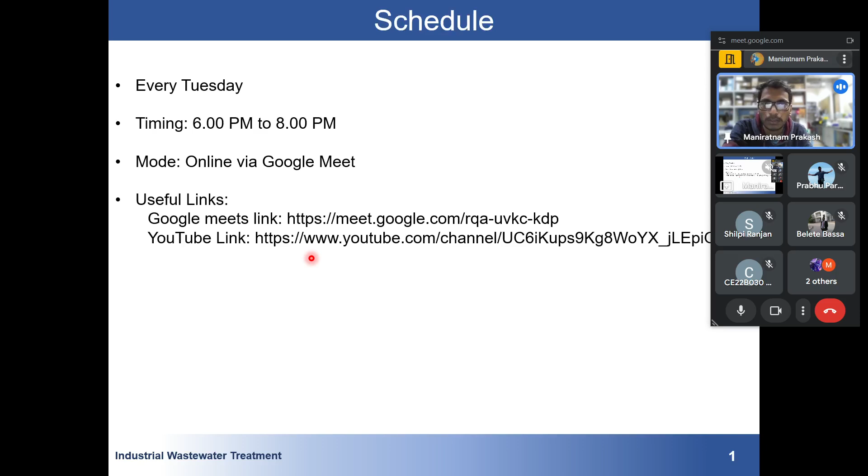Okay. So first, many of those who are attending this problem solving session for the first time, I will explain how things will work in this lecture and in upcoming lectures also. As this is known as a problem solving session, it is for 2 hours. So for the initial maybe 45 minutes or maybe 1 hour, I will be going through whatever material has been circulated to you.

Yeah, the lecture notes that have been given to you. So I will be just recapping in a very brief manner, not in a detailed way. I will be just going through some of the parts, like this has been taught and this has been taught. One of the most important things: you will benefit from this problem solving session only if you have watched your video. So I will be just recapping those things which have been discussed in the video.

And then at the end of the session, that is the other half, I will be discussing some questions that might be given to you for assignment purposes, or for the final examination if you are planning to attend it. Okay. So this will be the overall view. First there will be some discussion, and then there will be a problem solving session. I have been given 10 sets of questions. I have prepared the solutions, and those solutions will be discussed in a very detailed manner.

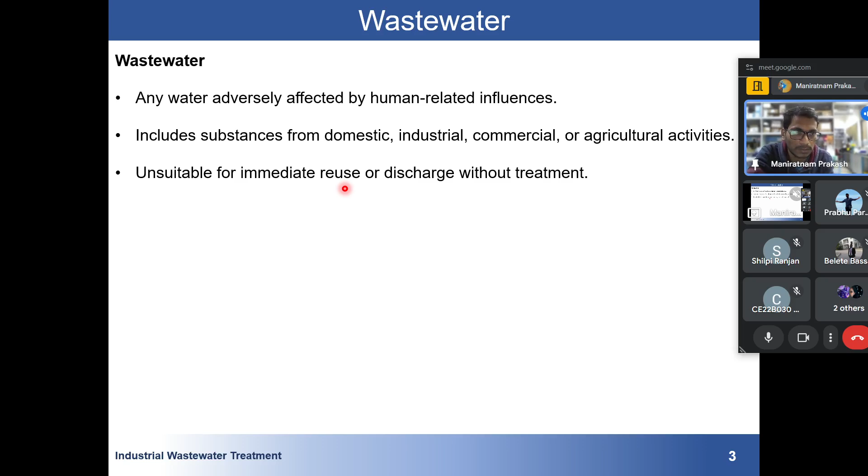And the final outcome is, once the water is affected by human activity, that water becomes unsuitable for immediate reuse and needs treatment. If there is some intervention from the human side, then that water must be treated, and only after treatment can we either reuse it or do some other kind of work.

There are several types of wastewater. The first is the most common wastewater, that is domestic wastewater.

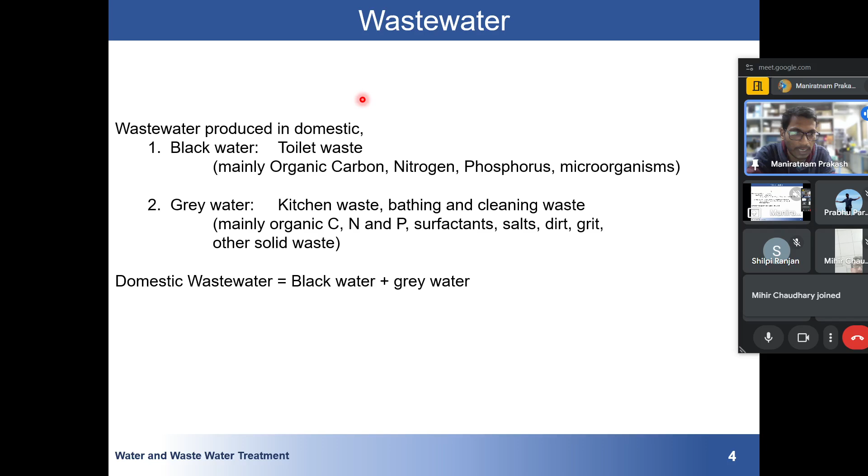Coming to industrial wastewater, which we'll be discussing in depth, it is generated from industrial and manufacturing processes. Suppose I am in Kanpur. Kanpur has a major leather industry; you might have heard that Kanpur is known as the city of leathers. For manufacturing leather, they use basic chromium sulfate.

Leather, which comes from animals, is initially very soft. To make it stiff and give it some shape, they use chromium sulfate. After treatment, this chromium will be leached out into normal wastewater if not treated well. There are provisions in every industry that if you are using this salt, you have to treat it, but we know that some industries are not following those norms.

If the water is discharged into normal sewage or a normal channel, it will mix with our normal water. So that industry is producing industrial wastewater contaminated with chromium. This was just the example of chromium. There are many examples from many places, like cadmium problems, lead problems, lithium problems. If you are residing in some industrial area, you might have heard of these kinds of problems.

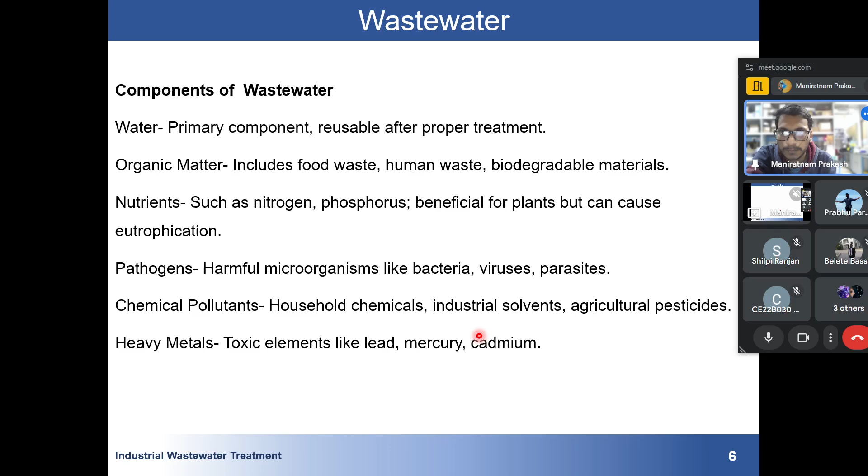So there are several practices of wastewater management: there should be proper collection of wastewater, like a proper channel, then it should be disposed, and if water is not so much contaminated, then it should be reused. We have learned about this. The treatment process requires physical, chemical, and biological methods to remove contaminants and ensure water is safe for discharge or reuse.

Remember, we are seeing that once the wastewater is generated, we have to treat it, and once the wastewater is treated, then we have two purposes. What I mean to say is that in India there is one pollution control board known as CPCB, the Central Pollution Control Board.

So this has set some norms, like now if you are treating water, you can reuse it. Reuse depends upon how much you have invested in your treatment and how advanced a treatment process you have applied, if the water is suitable for reuse. There is a particular requirement that if it meets certain criteria, then that water is suitable for drinking purpose, if the treatment process is meeting all the standard criteria for drinking water, that is IS 10500.

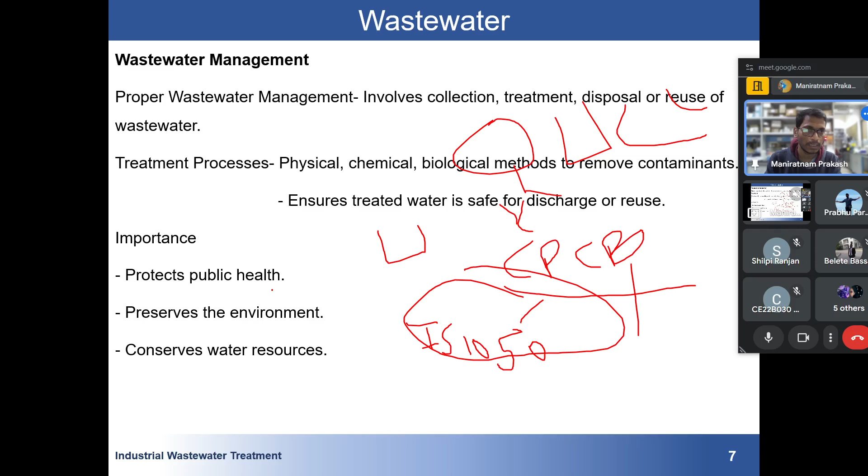Then importance: we know that we have to protect ourselves. Suppose without treatment you are discharging any wastewater, then what will happen? It will be mixing in the river, in the lake, and that lake or river will also be polluted with wastewater, and it will cause human health effects. And not only human health, it will affect aquatic life and all these things.

So we have to protect the public, protect the environment, and conserve water resources. We know that our fresh water is very limited. We have been reading from our childhood that we have a very limited amount of water, and if we are doing this wastewater thing, it will be a burden on our current water resources. Okay.

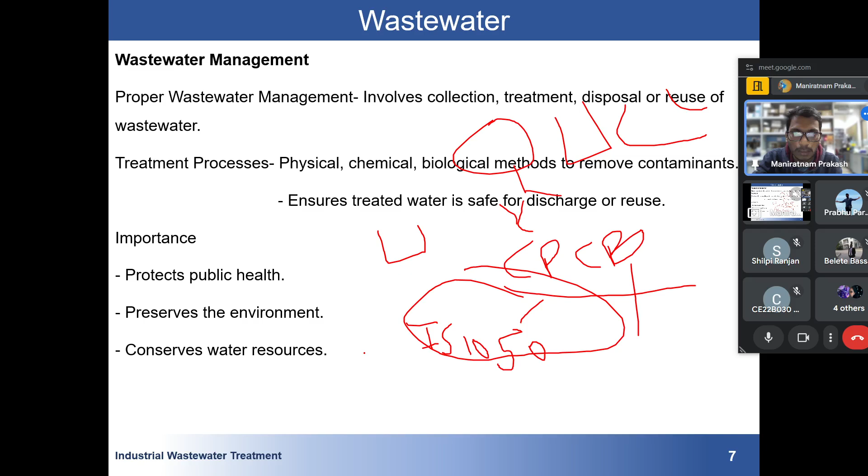So I think this was all about this. Whatever I was showing you, I was showing from the material which you have been given. So I think all of you have gone through this material. Have you received this PDF file, lecture 1? Yes. So in this PDF there are many things. Whatever was possible for me, I wrote in the PPT, and that PPT will also be available to you, and this PDF has already been given to you.

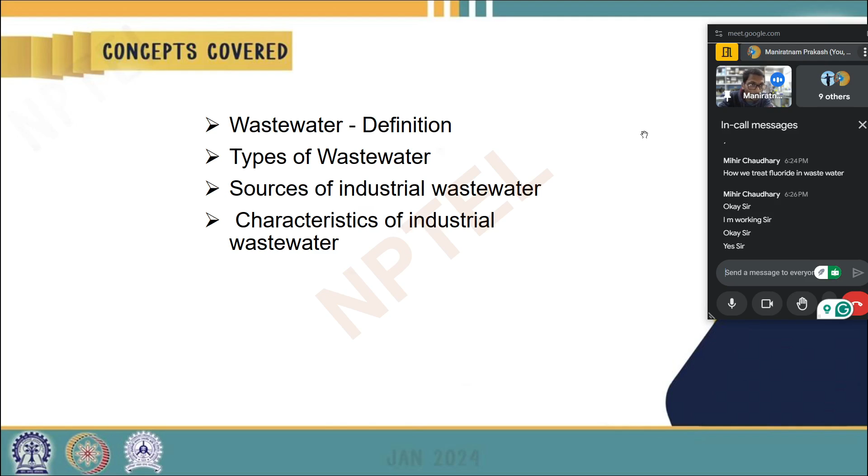This treatment process also depends upon how much fluoride is there. If high fluoride is there, people add calcium to the water. Calcium and fluoride react and precipitate CaF2, and we get treated, fluoride-free water. Any more questions, anyone?

There are several metal industries, aluminium, iron. Similarly paint: in paint we use lead. Wherever there is a paint industry nearby, several people have reported lead problems. Then the dairy problem: a huge amount of organic matter, milk and so on. Then pulp and paper industry, leather industry.

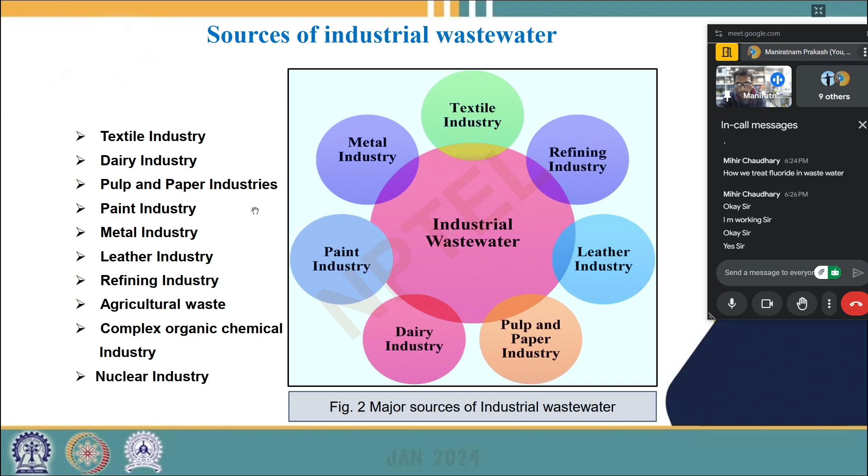Wherever there is a leather industry, you will see a chromium problem, and the chromium problem is very severe. If you are curious, search on Google Scholar chromium in Kanpur. The first thing will be that Kanpur, the city of leather, uses chromium sulfate. So these are some of the industrial wastewaters, and there is nuclear wastewater, the uranium problem. Storm water we have already talked about. Common pollutants we have also seen; I have discussed them very briefly, like suspended solids.

Then we have this thing I have not discussed. This is new: what are the different characteristics of wastewater? First there will be physical characteristics, how it is looking. Your wastewater will be very turbid, very black in color, there will be some foul smell coming, there will be a huge amount of solids, and temperature might depend upon what kind of wastewater is there. If organic wastewater is there, the temperature will be normal, so temperature is a variable thing. Okay, then we have chemical characteristics.

Dissolved oxygen, DO is dissolved oxygen. Remember, we know that our normal water has some normal dissolved oxygen, around 4 and 5. Now imagine that you have added organic carbon, some metals, something in your water. What will happen is that the organic matter will start consuming the oxygen present in your water. It will start consuming DO, and your DO level will be very low in your wastewater.

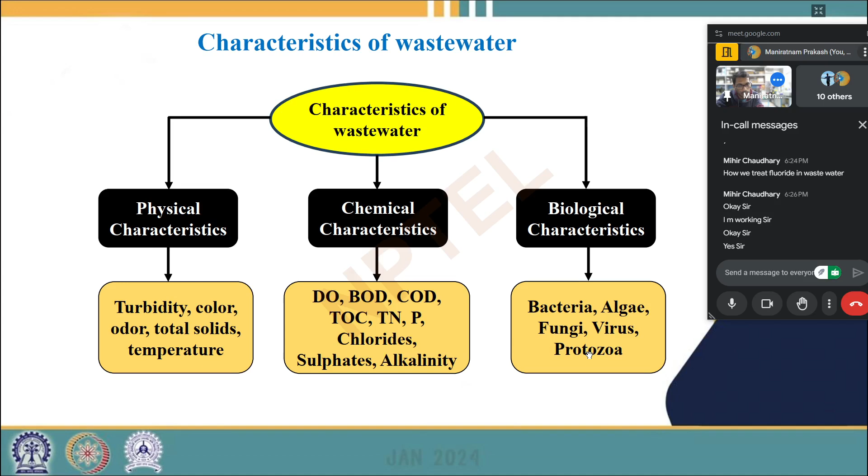Then we have total organic carbon, nitrogen, phosphorus. Phosphorus will be coming from our food, since there is some nitrogen and phosphorus in it, and also from agriculture. See, these are not characteristics of industrial wastewater, these are characteristics of common wastewater. Then we have biological characteristics: there will be some bacteria, algae, fungi, protozoa, depending upon the type of wastewater.

Okay, so this thing I have. I will be going in a very fast manner. This has already been discussed in your lecture. So if you think something needs to be discussed more, you can just stop me and ask me.

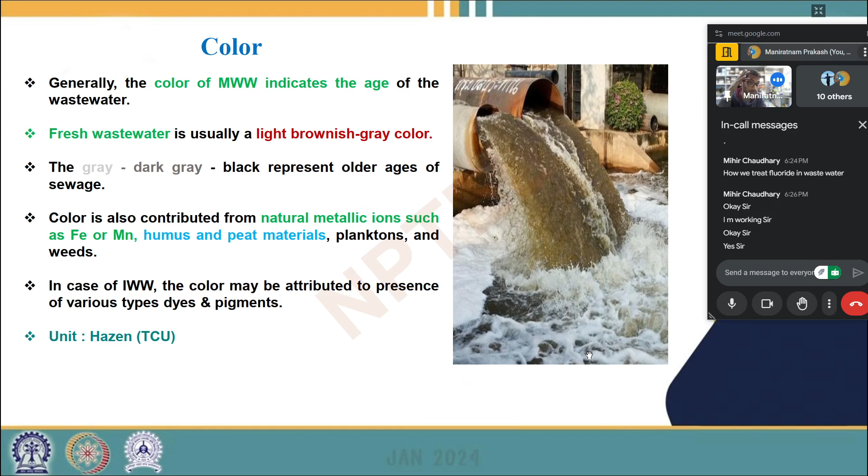Industrial wastewater. Then I said temperature depends upon the type of wastewater. Industrial wastewater may increase the temperature of neighboring downstream water. There is less DO in warm water than colder water. This is very common: if you boil your water, the oxygen which is there in water will escape. That's why it is a common statement. Less DO is available for natural biodegradation of organic matter. Bacterial action increases at high temperature, resulting in acceleration. So this is the role of temperature.

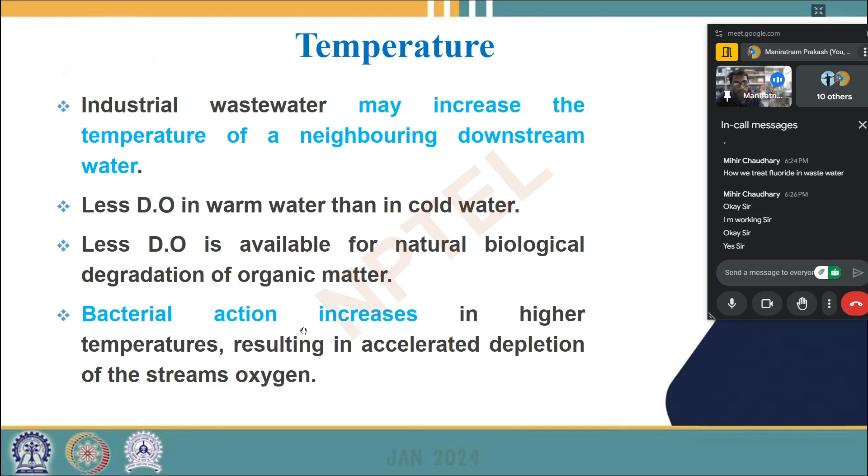Effect of temperature: rate of reaction increases, rate of resolution increases, viscosity of the water also decreases. Okay. Total solid, which we have already seen: there will be settleable solid, colloidal solid, dissolved solid, and floating solids. Okay. So one should have an idea of this thing also.

Suppose if you are performing some experiment, and if you are finding some kind of solids, then what will be its normal size. This chart is a very famous chart, everyone uses this. You can see that anything below 0.001 micrometer, that is 10 to the power minus 9 meter, will be dissolved.

I think there is a boundary point of 0.22 micron. Just go and check. There is a boundary point of 0.22 micron. If something is below 0.22 micron, it is considered as dissolved. If something is between 0.22 to 0.45, then it is known as colloidal. It is written in a very general way, but there is a particular boundary also: below this will be dissolved, above that will be colloidal, then above that will be settleable solid.

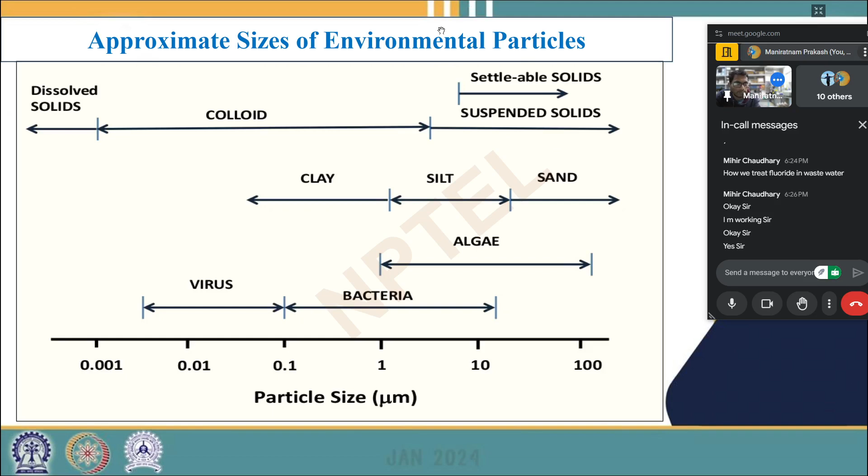But in our wastewater we have suspended solid, that you can see. Then something dissolved; we know that sodium is there, calcium is there, that will be in dissolved form, and that will also be considered a kind of solid. Then we have organic carbon, which will be volatile in nature. Then something will be colloidal, like milk particles, and all these things.

There are different tests. If you want to find out the total solid, then you have to heat your water. Generally for finding total solid, we take our wastewater and heat it at 105 degrees Celsius for 24 hours, and then we have total solid. Then for volatile solid, we heat at around 500 degrees Celsius, and for this we use a special crucible.

Heating at 105 can be done in normal chemical glassware, not our homemade glass. But for heating at this high temperature, there is something called a crucible. It is laboratory equipment that can sustain a temperature around 1000 degrees Celsius. So we put our water in that crucible and heat it at 500 degrees Celsius for only 1 hour, not more than 1 hour. At this temperature, 1 hour is sufficient.

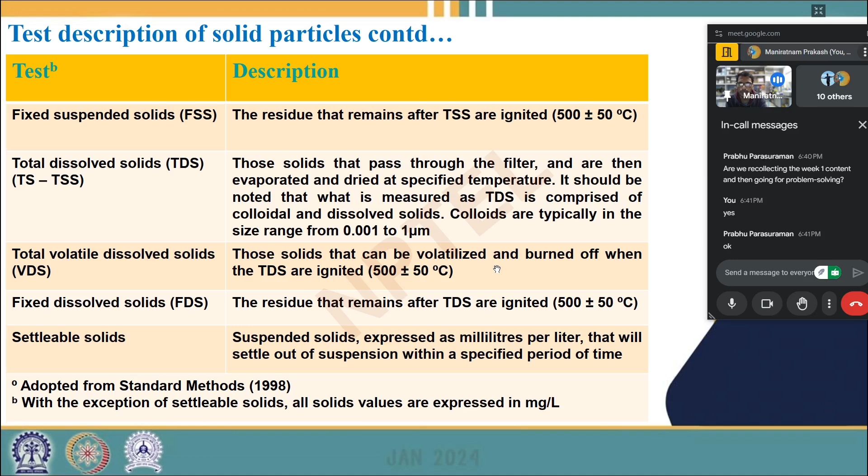Then we have chemical parameters like pH. Our normal pH is 7. Due to the presence of anything, pH might be increasing or decreasing. One should know the pH formula: pH is minus log of H+ concentration. You have to somehow find the hydrogen concentration, then take log, and then minus of log, that will be your pH. For pH measurement: inorganic salts, acid or alkali, organic matter or toxic chemicals may be present, microorganisms will be present.

Then we have biological oxygen demand. I'm not going to discuss it in detail here, but in a simple way, to degrade organic matter present in our wastewater, there is need of some oxygen. That oxygen is known as biological oxygen demand. Sorry, biochemical, not biological. This is a common misconception; people say biological. BOD is biochemical oxygen demand. So organic matter is there that is degradable.

Our organic matter will be in two forms, a degradable form and a non-degradable form. The amount of oxygen required to degrade the degradable component is known as biochemical oxygen demand. The amount of oxygen required by microorganisms for decomposition of the biodegradable organic matter under aerobic conditions is known as biochemical oxygen demand. If you have gone through the lecture, this has been discussed.

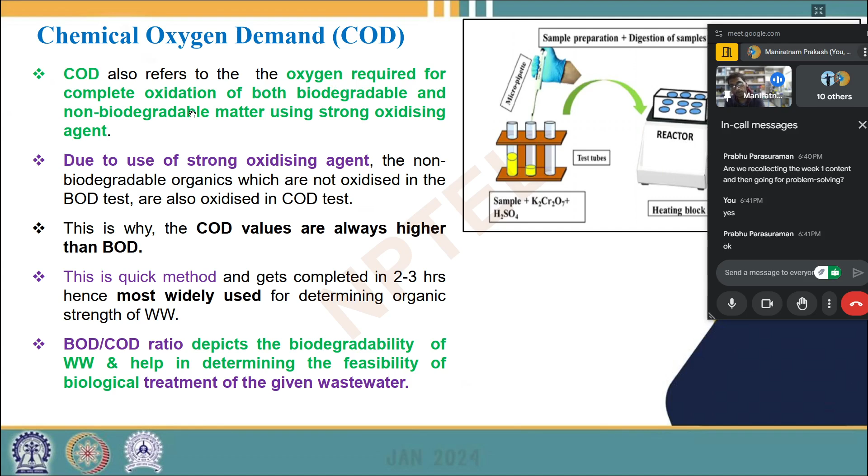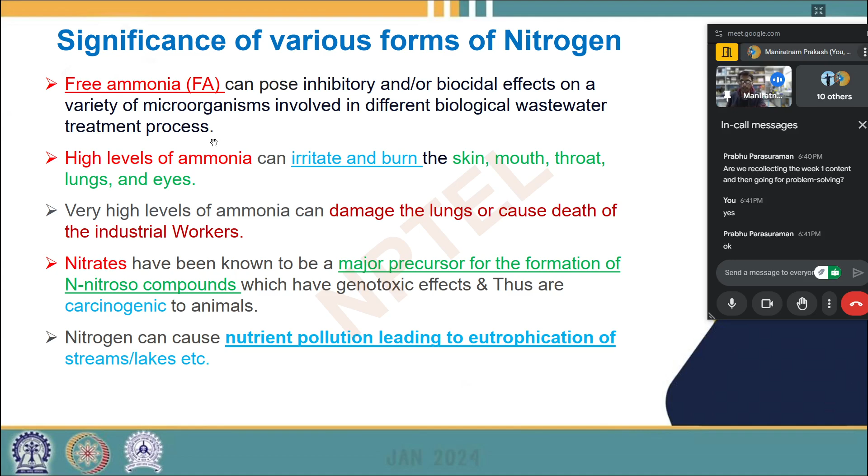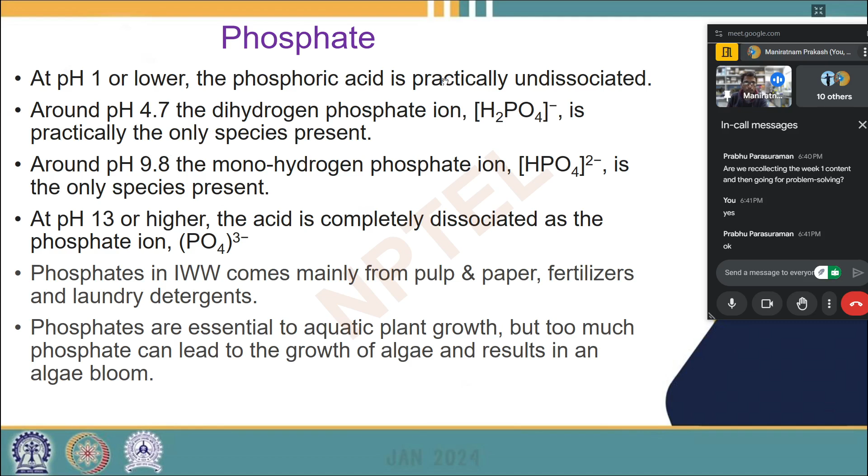Phosphate, again, will be in different forms. There are a total of three forms of phosphate, such as H2PO4. Depending upon the pH, different types of phosphate will exist in your system. But our normal pH is around 7, so most of them exist in the form of H2PO4 minus only.

Then heavy metals, which are due to industrial waste. Removal of heavy metals from wastewater is through precipitation. We will add some chemicals, and that chemical will react with the existing heavy metal, and we will have precipitation of heavy metals. Then ion exchange, then adsorption process.

You can see the different problems due to the presence of different heavy metals. Chromium is carcinogenic, meaning it is cancer causing. And there is a limit; you can look at the limit in IS 10500. Suppose your drinking water is above the permissible limit, then that water is not suitable for drinking purposes, and it also needs treatment. There is a limit for everything: chromium, arsenic, cadmium, lead, copper and mercury.

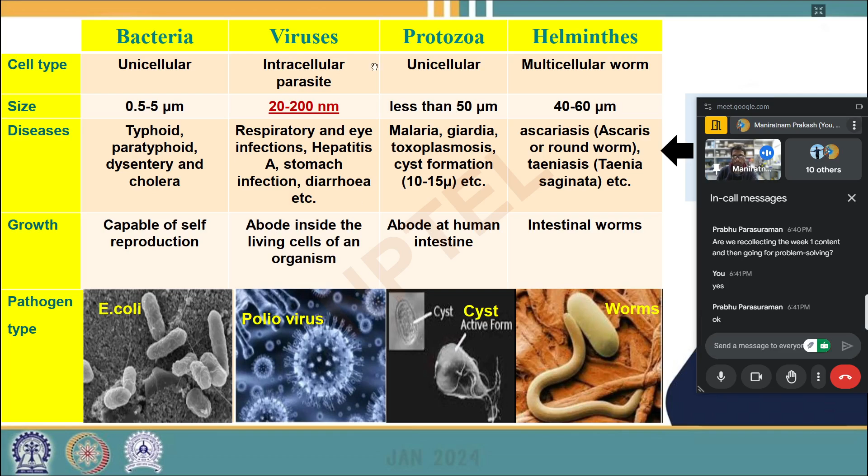Biological characteristics: we have seen that there will be bacteria, viruses, protozoa, and the presence of any of them will cause some kind of disease. So this is an important thing: what are the origins of different industries, and what kind of waste they are producing. I think you have already gone through this.

So this is what I was discussing: prevention and control of pollution. Like I said, either I can reuse it or I can discharge it. This table is very old, but the latest issue has also come.

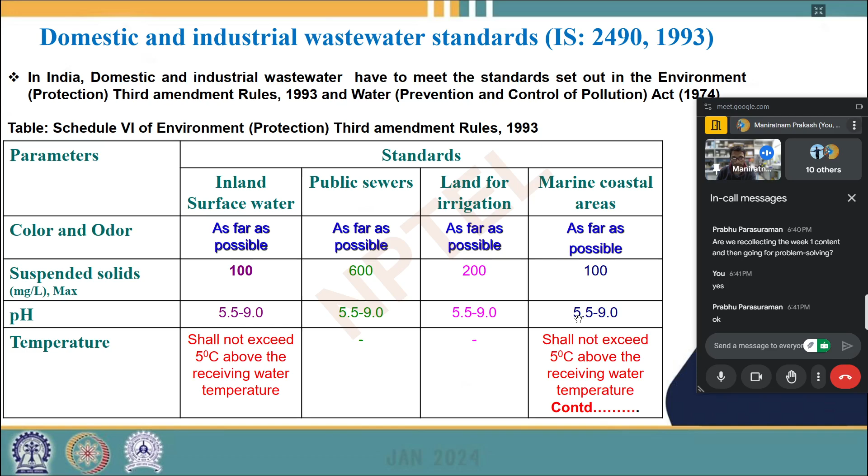Like you can see, if you are preparing for an exam, I think you should get updated with the latest norms which are there. Okay. So suspended solids: if your treatment level is such that you are bringing your suspended solids within 100 milligrams per liter, and pH between 5.5 and 9.0, then you can discharge in the marine coastal area. Similarly, different wastewater parameters have different limits, and as per that you can discharge there. Okay.

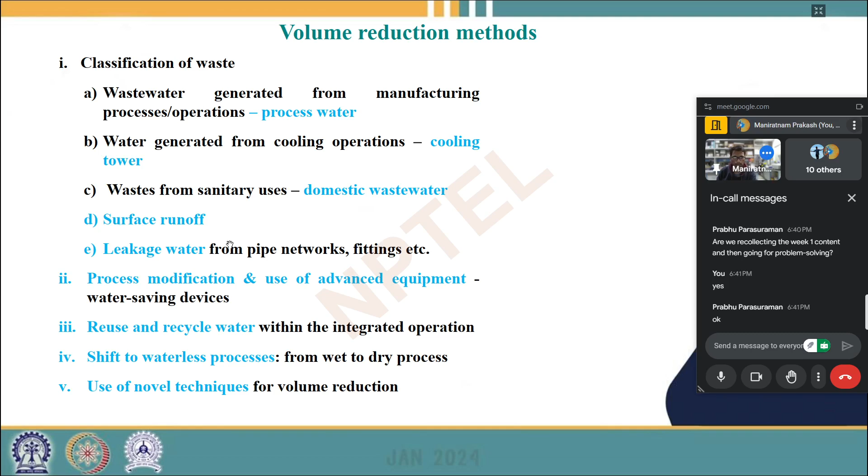So management is volume reduction. Again, this is if we have to control it somehow. There are several ways volume reduction can be done, several methods, like at home also you can. I'm not going into strength reduction and volume reduction in detail. If we talk about management of industrial wastewater, then strength reduction means we are talking about a particular contaminant. Suppose a particular contaminant is very high; if we somehow reduce its strength, then automatically we will be treating our wastewater in a far better way. Okay, there are several methods.

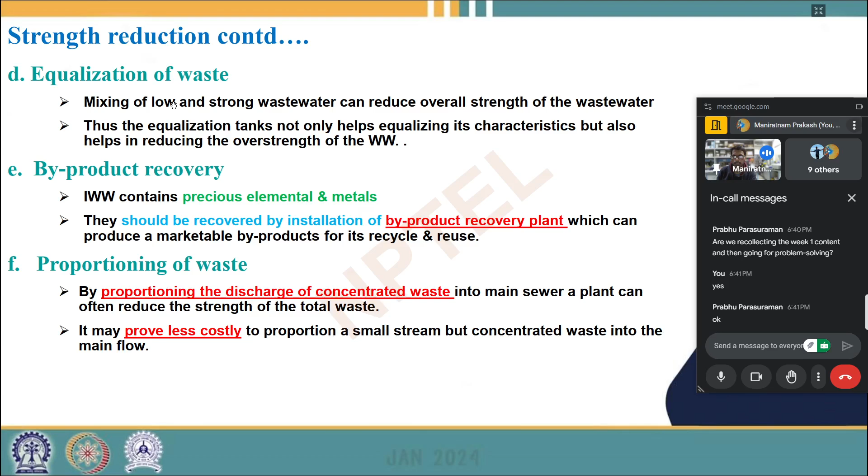Then we have the equalization tank. An equalization tank is required to equalize the flow and the concentration of incoming wastewater to the treatment plant. So till this point we were not going into the treatment plant; it was about what the public can do and all these things. But suppose your wastewater has reached the treatment plant, then there's something called an equalization tank. Okay. So for treatment purposes we have different units, and each unit has a particular capacity.

Suppose there is an aeration tank, then there is a primary sedimentation tank. Each has a particular capacity, and that unit cannot take water beyond a particular limit. So the flow reaching that unit should be maintained. Maintaining the flow and the volume the unit receives is controlled by the equalization tank. The equalization tank is often required to equalize the flow and concentration of incoming wastewater to the treatment plant. It helps in providing better mixing, air injected in the basin, chemical oxidation of reduced compounds, some degree of biological oxidation, and agitation to prevent suspended solids from settling.

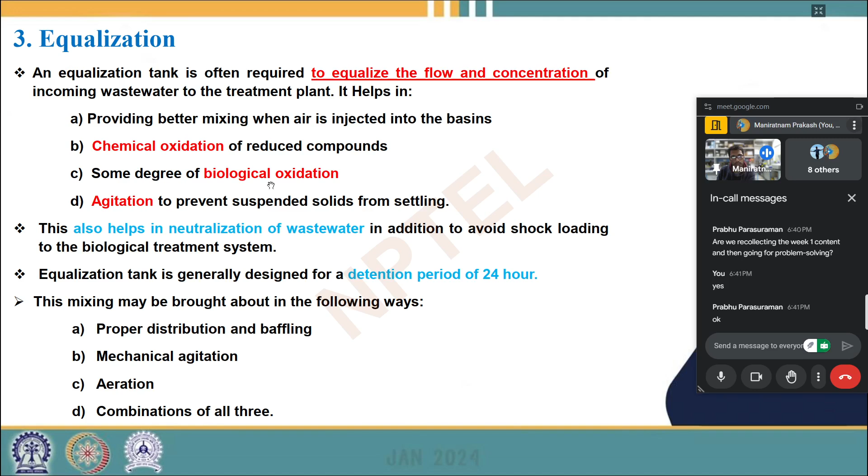Okay. So once the flow is maintained, water can be passed to the next treatment unit in a better way, so that there is no burden on the next unit. So you can see these are some of the different equipment used for mixing. Mechanical agitation is there. The use of a particular instrument sometimes depends upon the type of wastewater, or the type of minerals and heavy metals present in your wastewater.

I will give a simple example. Suppose your wastewater contains a high amount of iron. To treat iron there is no need to add any special chemical. They will pass the water into such a confinement and do agitation. Oxygen will pass into the wastewater, iron will react with oxygen, and it can precipitate out. This is the most common practice used in many industrial wastewater treatment plants. That's why mechanical aerators are used. Wooden-type agitators are spaced equidistantly along the center line of the length of the tank, operate at this speed, and are usually adequate.

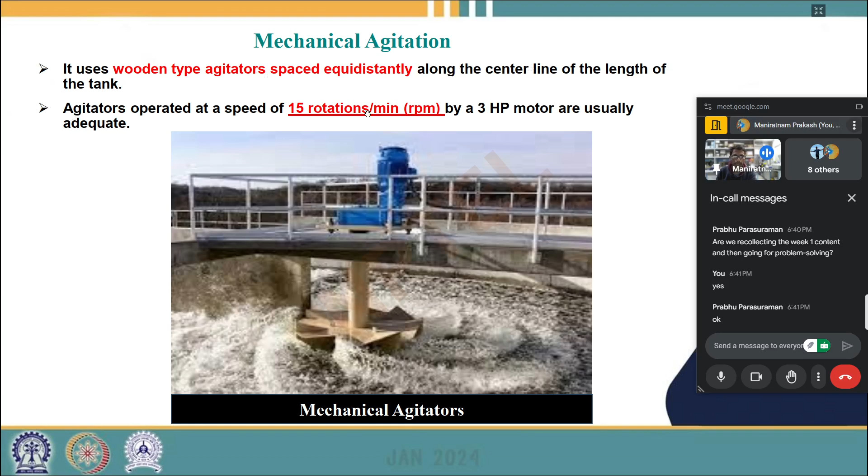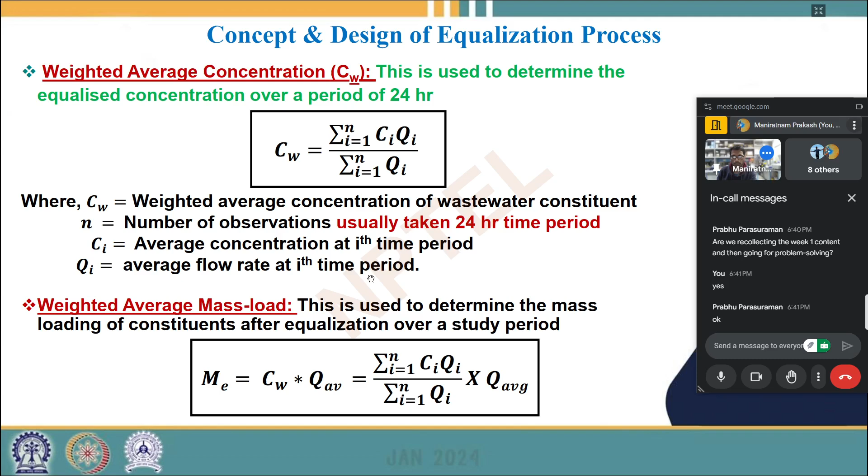Okay. So the main thing is that in the aeration tank, whatever we can take out with the help of oxygen, we take out. Now concept and design depend upon the loading. Loading means how much mass is coming per unit time. There are some formulas, like peak-to-peak mass loading. All these factors help in the design of different treatment units. Okay.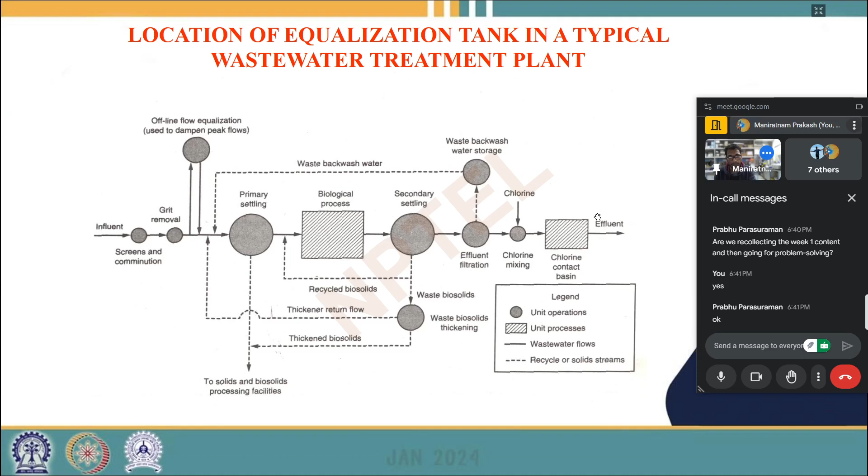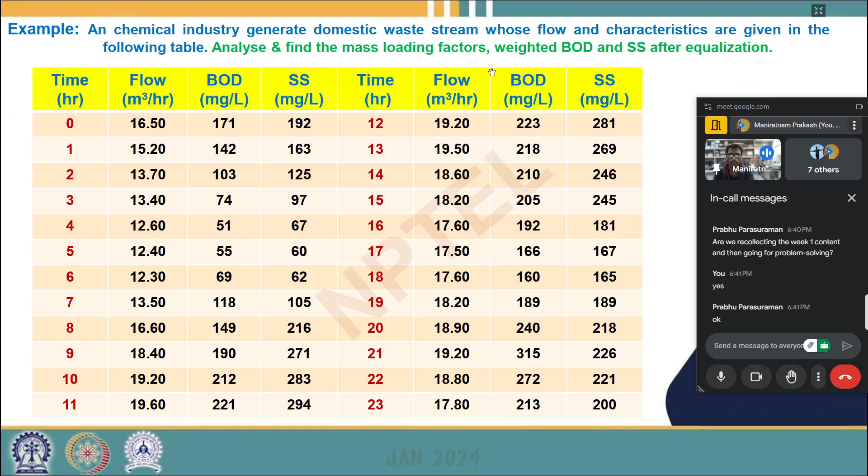This is a simple thing. There is some example also to analyze the mass loading and equalization tank, what they are trying to find. This is an example of how BOD and SS is increasing in our industry.

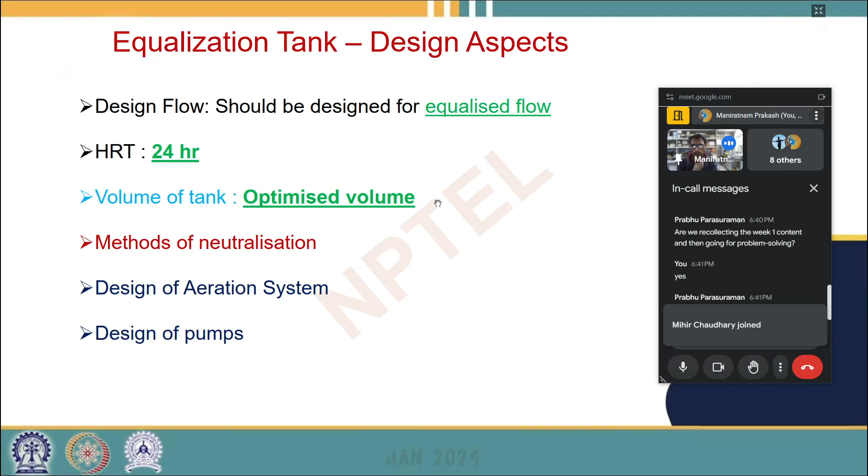So for design, there is something called analytical design and graphical design. I want to be discussing this thing. Analytical design is actual calculation and all these things. Graphical design is on a graph.

Then we have neutralizing. Depending upon the type of chemical, the pH of our industrial wastewater can vary; this I will just read out. Neutralization is one important process to make the water near the neutral range, where pH should be within 7 to 7.5. For discharge purposes, we have seen the pH should be within a particular limit, between 5.5 to 9.

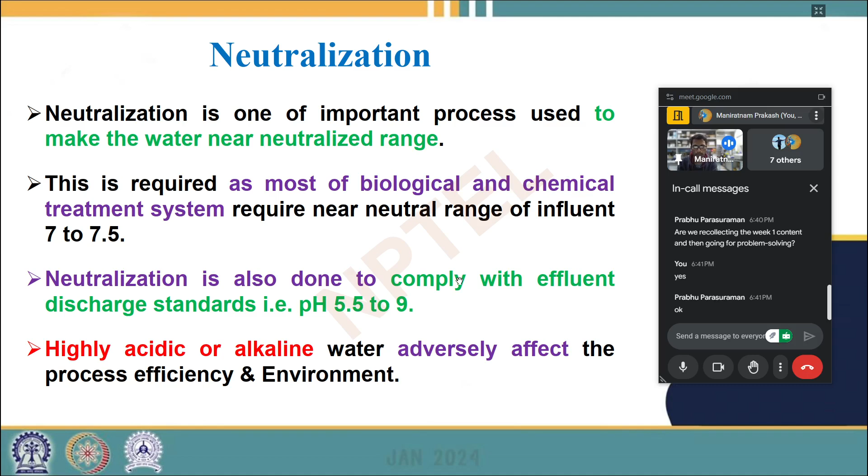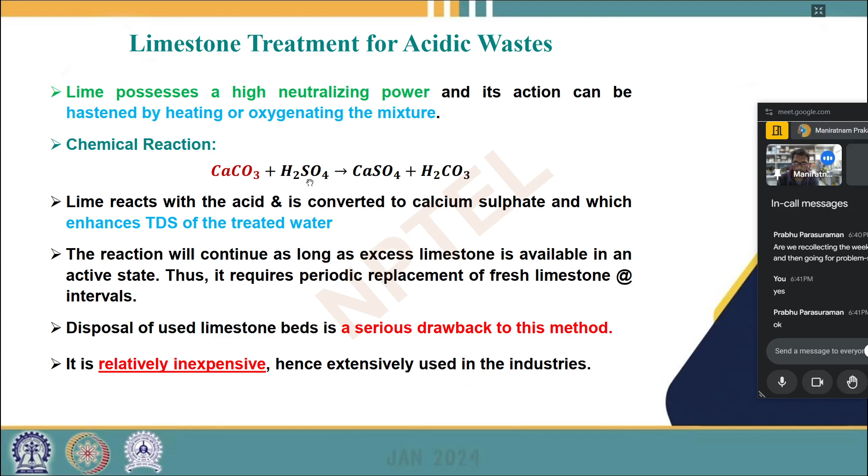With the help of some chemicals, generally neutralization is done. If the pH is high, we have to add some acid-type material so that the pH can be brought in the range of 7 to 7.5. Similarly, if the pH is low, we have to add some basic material. Here you can see lime acid treatment, lime slurry, limestone, sulfuric acid, carbon dioxide treatment. If we add limestone, that is CaCO3, in presence of acid, it will change the pH.

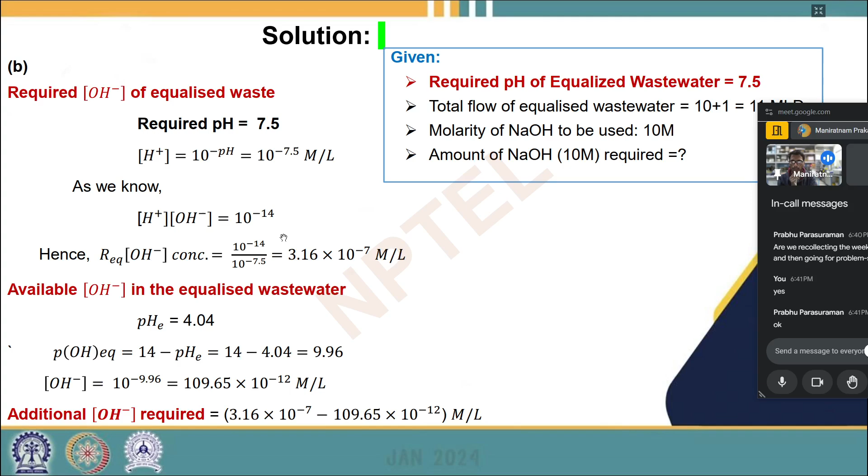There are different things. These are some of the questions which have been given to you to solve. Does anyone have any doubt in these questions? This is just a recap because it's already 7, so I will start problem solving, I will start this session. Anyone have any doubt in this question? Anyone? I think there is no doubt.

Yes, sir. Okay, so how can I help you? You can speak if you want.

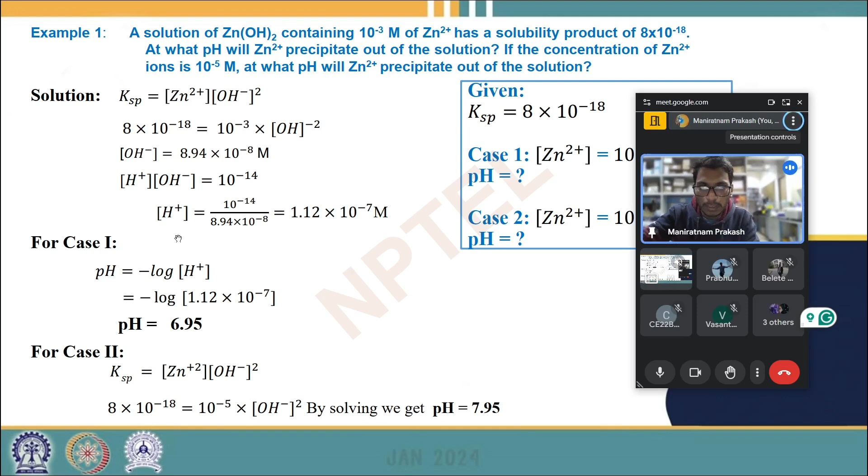Actually, I'm not able to find my calculator, so I think I will use this calculator. I don't know where.

So I think we have... See, it will be 8. See here, it is not minus 2. Just remember, it is like a square. It is OH minus squared. Okay. So here you have to take a square root of 8 into 10 to the power minus 15.

Okay. So I have to take the square root of 8 into 10 to the power minus... Oh, sorry. I have to use a bracket. 8 into...

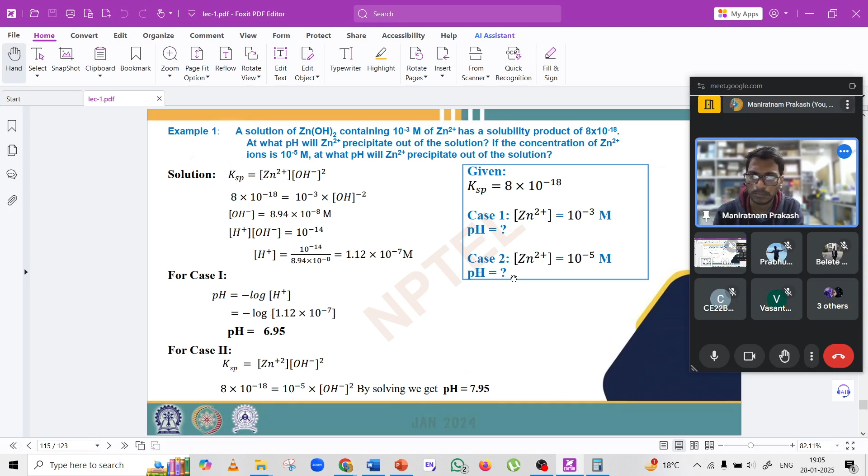Okay, now I think there is one printing mistake. It will be OH minus. It should not be minus 2. Okay, now I will note it down. I hope this is good. Then again we have the second question.

If the paper mill having this much BOD needs to be proportioned in such a way that overall BOD comes to be 500 milligram per liter. The proportioning has to be done by mixing domestic wastewater having this much BOD. Find the amount of domestic wastewater flow needed to be diverted if the paper mill flow is 6.5 MLD.

Okay, so see how things work. There is a paper mill which has this much flow coming and contains this much BOD. BOD just shows that this much oxygen requirement is there; it's just an indication of pollution. Instead of BOD someone can use other things also. Then we have to find Q2. So you see here what they are saying, and the ratio has to be...

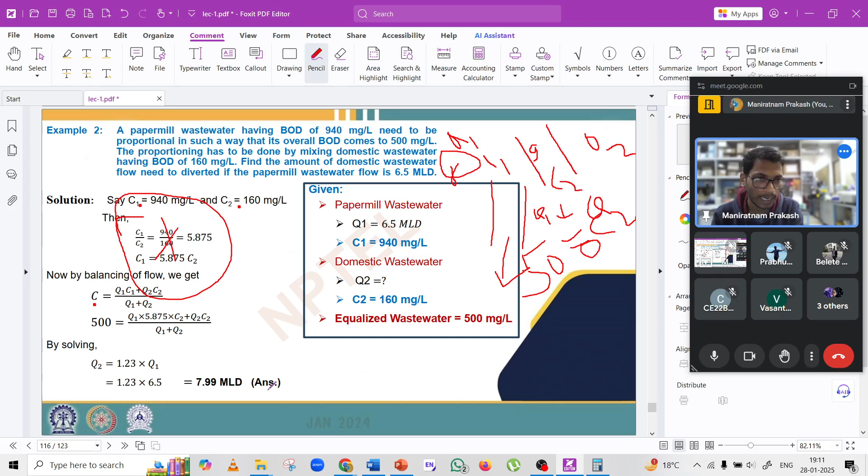Any doubt? Where is the chat section?

Again same thing. There are two wastewaters, W1 generated from chemical waste. W1, Q1 1 mld, pH this much, BOD this, W2 this, pH this, and BOD is this. What is the pH after mixing? What is the amount of NaOH required to equalize the pH to 7.5? What is the proportion of the two BODs that need to be mixed to get an equalized BOD of 800 milligram per liter? So here also, for the first question and third question, the same mass balance you have to use.

Okay, now mass balance: there will be c1 and q1 for this, c2 and q2 for this, and finally we have a bigger discharge, that is q and c. Now q will be q1 plus q2, and c you have to find. So in the case of this question, c is my pH. We know that pH is minus log of H plus concentration.

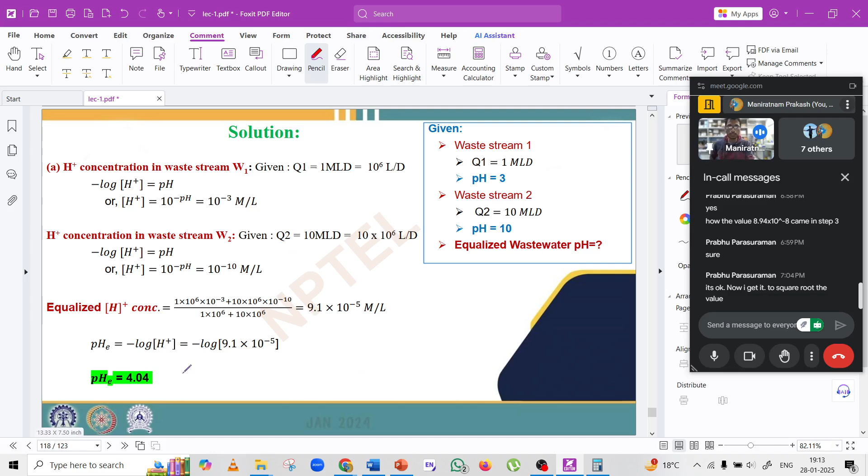So again you see they have utilized the same formula, q1 into c1 plus q2 into c2 divided by q1 plus q2. This is q1 into pH plus q2 into pH divided by q1 plus q2, and they have taken the log, and finally they have found the pH. Okay, now the second question was, if the pH is this much, how much I have to add so that the final pH is 7.5.

So required pH is 7.5, that is 10 to the power minus 7.5. And we know that if this is the pH, then OH concentration will be this much. We can find it by H plus into OH minus by doing this mathematical expression. Our wastewater pH is 4.04, and we have to make it 7.5. So there is a difference of this much. So how much OH should be added: this much minus this much, that will be the final amount of NaOH that should be added.

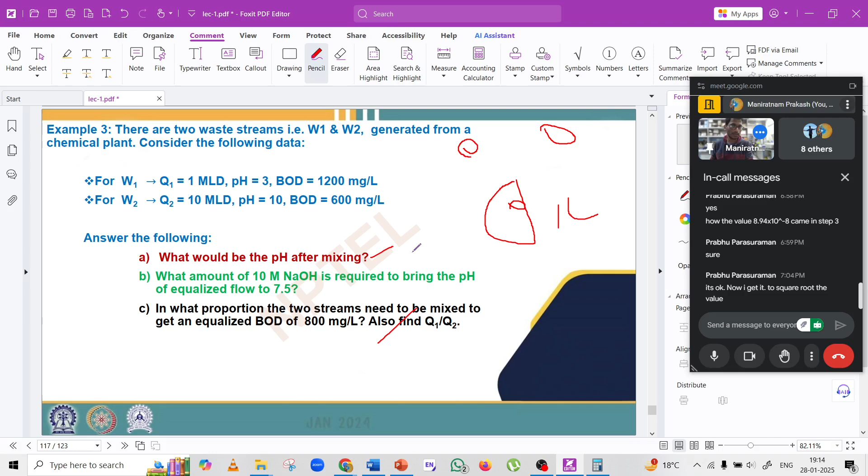Okay, now this much OH is in mole per liter. But you have to report your answer in liter per day. It's not written in the question, but generally, if there is a treatment plant, the amount of any chemical will always be added in liter per day, that this many liters of that chemical are required on that particular day.

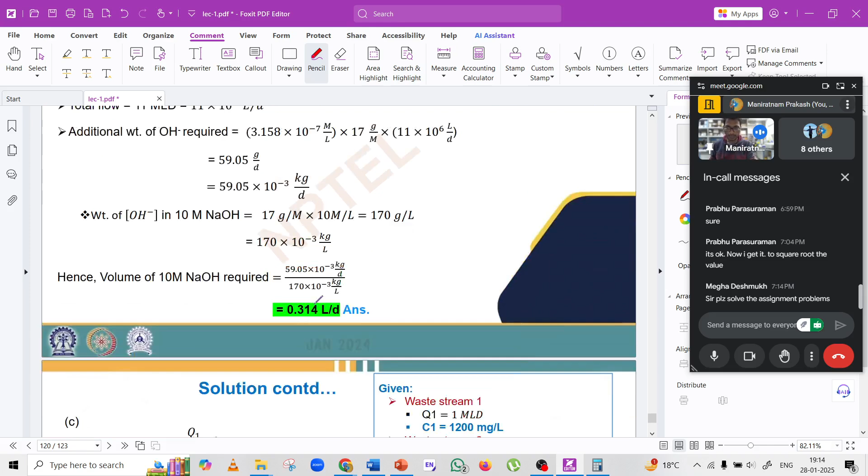So you know the OH minus concentration, you know the molecular weight of OH. So this mole can be converted by multiplying with molecular weight. You can find the required amount of OH that should be added to your wastewater. Similarly, the last question is also the same thing. You have to find Q1 by Q2. Then the same mass balance formula you have to apply.

Okay, so these are the assignment questions, directly from your lectures. So I will request you to participate in the question answer. I have a detailed solution of each and everything, but just take a few minutes, try to answer it. You will see that whatever has been discussed in the lecture, the questions are directly from those lecture videos only. So the first question is,

which of the following statements is or are true for equalization tank? This is a multiple correct question. This helps in dampening the shock load. This helps in equalization of the flow only. This is provided after the biological treatment. And there is none of these. If you have gone through the pictures, you can see that the equalization tank is provided at the start of the treatment plant.

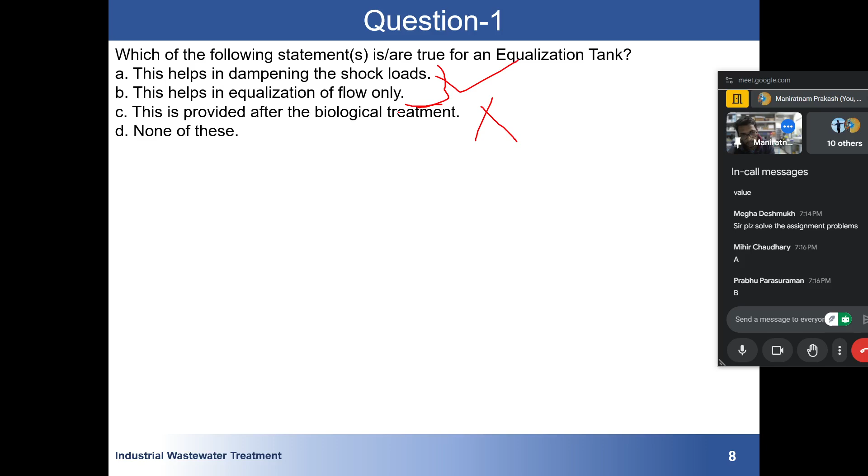Shock loads for which thing? Shock loads for the upcoming unit. Equalization tank has the purpose to equalize the flow. The first unit is primary sedimentation tank, and primary sedimentation tanks are designed based on the discharge value, among many factors. So the water going in the primary sedimentation tank should have a constant discharge, and discharge or flow are the same thing. So the flow should be maintained. That's why this equalization tank is used. So it helps in dampening the shock.

Yes, first one is correct. This helps in equalization in flow only. Yes, it only helps in equalization. It does not help in any kind of treatment. Just go through the lecture, you will understand it. It is provided after the biological treatment? No, biological treatment is after primary sedimentation tank, then we have coagulation tank, flocculation tank after that. So the correct answers are A and B. Okay.

See, there is one thing partially correct I have written here, because if you have gone through the lecture, you will see that this equalization tank has something called aeration unit. So it is partially correct, but if you want to get full marks, you have to mark both, A and B. I have given the reason also. The equalization tank is designed to buffer the variation in wastewater characteristics such as sudden fluctuation in flow rate, pH, and pollutant concentration.

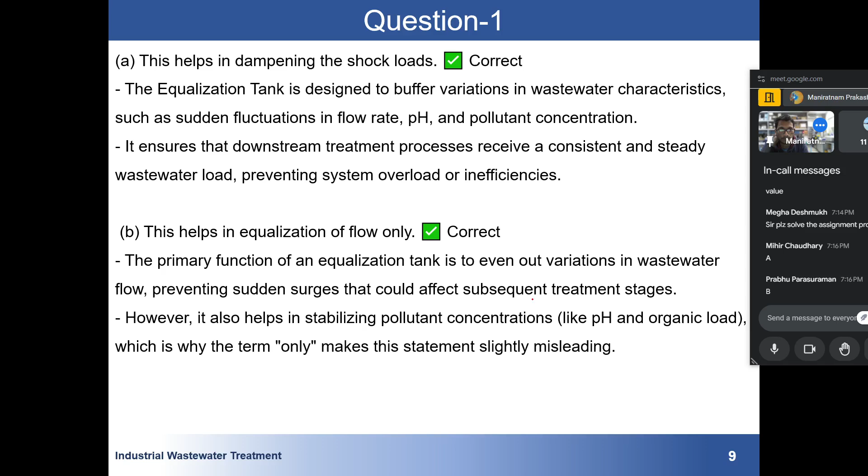Hmm. This is incorrect. If you have gone through the picture, you can see the biological treatment comes after primary sedimentation. Second question. Try it. I want everyone to participate.

Which of the following is or are false? Again, it is multiple correct. See, whenever there is "is and are", you have to think twice. Someone was marking only A and B. It's not always true. Just think twice. Whether single correct or multiple correct, go through each and every option and then try to answer it.

Anyone? ABC. Reduce... it is saying false. The first one is true. How can you say this is false? First, read the question. It is asking which is false. Reduce, reuse, recover, recycle are the three R of industrial wastewater. It is true. Let's see the answer.

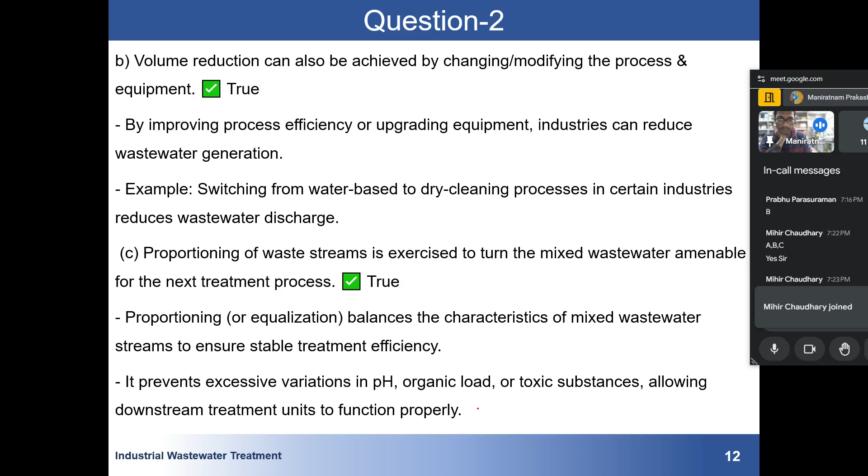The option which was false: recovering of the precious metal does not help in reduction. Recovering precious metals such as gold, silver, copper, nickel from industrial wastewater actually reduces its overall pollutant strength. It's not just about precious metals. If any kind of metal or contaminant is there and we remove it before treatment, otherwise it would cause a burden to the different units in the treatment plant.

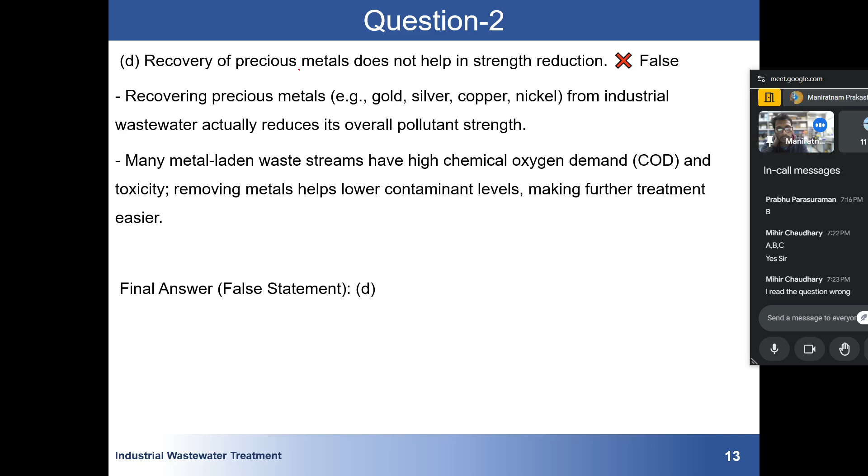So many metal-laden waste streams have high oxygen demand and toxicity. Removing metal can help lower contaminant levels, making further treatment easier. If you remove something from your wastewater before treatment, then obviously your overall treatment process will be easier. So it should be "does help", not "does not help". That's why it is false.

Next question, on solids. Again, read the question. Which is or are false? B. Just read the question, take your time, and then answer.

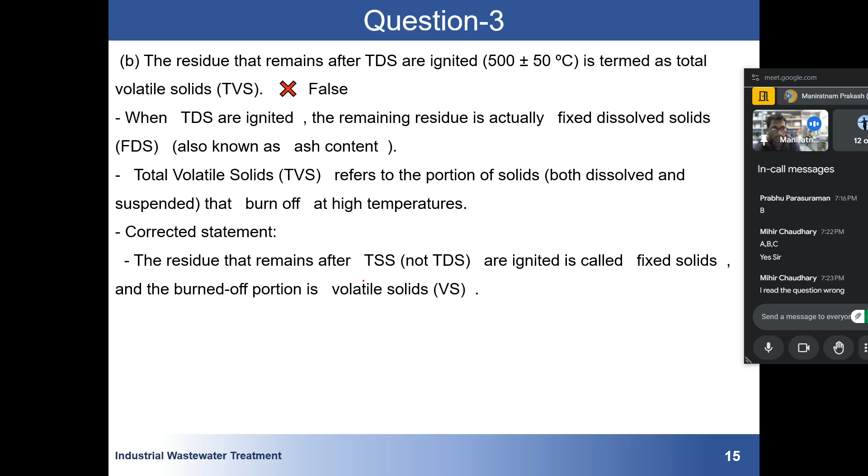Volatile solid refers to the portion of solid, both dissolved and suspended, burned off at high temperature. The correct statement should be: the residue that remains after TSS, not TDS, are ignited is called fixed solid, and the burned off portion is volatile solid. I hope this is clear. The other options are correct; I have also discussed them, and I think you all have an idea.

Imhoff cone, remember Imhoff cone looks like this. We take our wastewater, add it, and leave it for 1 hour. All the settleable solid will get deposited here in this cone, and there is marking here, 5 mL, 6 mL, 7 mL. Depending upon that, we report that in 1 liter this much settleable solid is there. Settleable solids are the fraction of suspended solid that settle at the bottom of the graduated cone within a specific time, usually 1 hour. The test is commonly used in wastewater treatment to assess sedimentation characteristics. Final correct answer is B.

Fourth question, I think everyone should answer this question. In presence of H2S, which kind of smell? B smell? C, rotten egg. This is correct. H2S, which is a colorless toxic gas, has a rotten egg smell. So C is correct. This is in your table also.

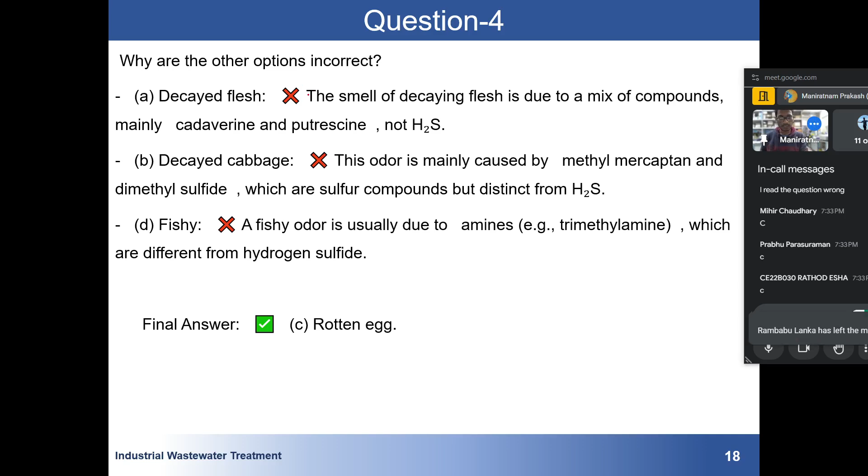What is the purpose of determining BOD versus COD ratio?

This is a single correct question. Again, I have not discussed this thing, so it is expected that you must have seen your video lecture. If you have gone through the video lectures, you might be able to answer this question. I have not discussed this thing, I have just told you this: BOD is used for degradable organic matter, and COD is used for both degradable and non-degradable organic matter. I think based on this information also you can answer this question.

What is the purpose of determining this thing? To check the oxygen level in wastewater? No. To check the oxygen level we will be checking dissolved oxygen. I have said this thing. S. S or A. The correct answer is biodegradability. See, A is the correct answer.

So see, just based on this information. For more detail you can always go to your video lecture, but based on this information, BOD tells about degradable organic matter and COD tells about both organic, degradable plus non-degradable. Okay? So this ratio is an important parameter used in wastewater treatment to assess how easily organic matter in wastewater can be biologically degraded.

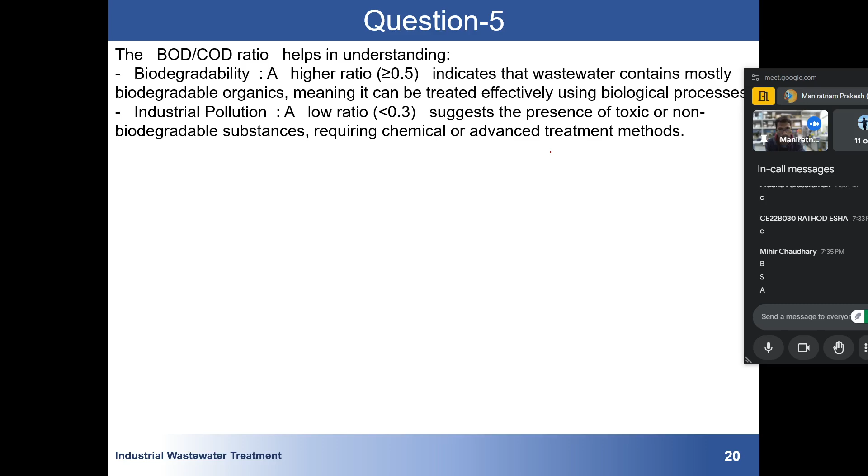Other options are incorrect. DO is checked to check the oxygen level. Acid neutralizing capacity is another thing that depends upon the pH; for acid neutralizing capacity we go for the parameter called alkalinity. We do not rely on this BOD.

Which of the following pollutants is generally not found in industrial wastewater? Not found. Again, read your question. Read the question. Not found.

See, all, I think you should all participate. I don't know why only a single person is answering the question. What about others? There are a total of 12 people. I encourage everyone to please participate, else it will be single-way communication. I will just keep speaking.

See, you are asking which is not generally found in industrial wastewater. Someone says B, someone says C. See, sediment. In this type of question, it might seem very easy, but you have to think. Heavy metal is found in industrial waste. That is correct.

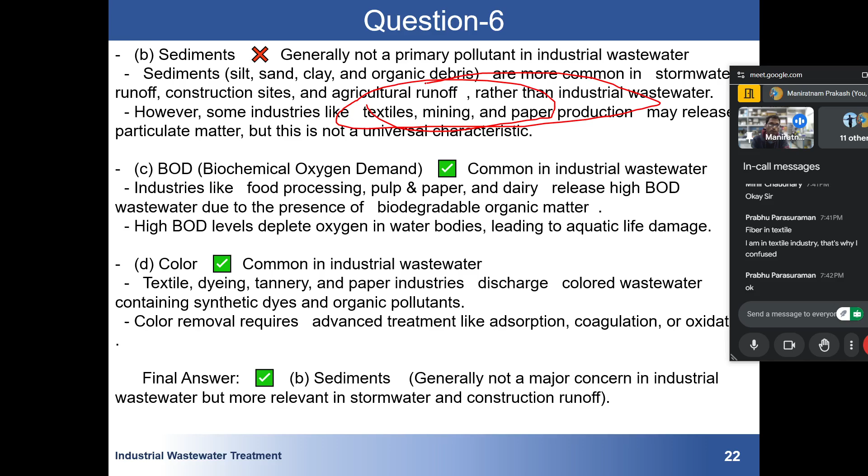If someone is talking about industrial wastewater, you will find some industrial wastewater that does not have color, but it doesn't mean that it is universally true. That's why here I have written generally not found in industrial waste in significant amount. Here also I have written more common in storm water. However, some industries like textile, mining, and paper production, I have mentioned to avoid any kind of confusion. The mining industry will also contain huge amount of sediment, but that is just for those particular cases. I hope this point is clear to you.

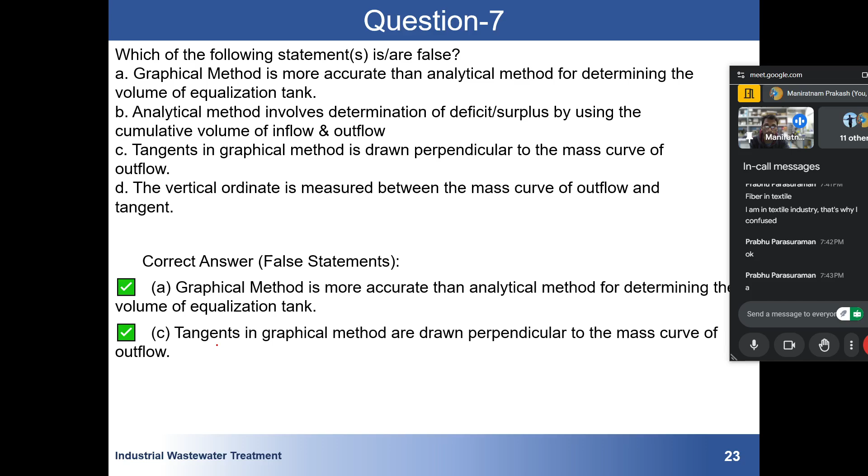Coming to the seventh question, this thing I have not discussed. This is multiple correct, and to answer this question, you have to see your video lecture. A, it is multiple correct. If multiple correct, then a single option can also be correct, but don't be in a hurry. Okay, I have got one answer. The correct answers are A and C. Graphical methods are more accurate than analytical methods for determining the volume of equalization tank. The tangents in the graphical method are drawn perpendicular to the mass curve of the outflow. I might not be able to explain in a better way, but I have a few explanations.

See, the analytical method is more accurate. In the graphical method we are just plotting some diagram and based on that we are trying to determine. If you have gone through the design, you might have seen this type of plot is drawn and a line is drawn, and based on the difference we try to find out the maximum discharge, and based on that the length. But that is not a good method. In the analytical method we perform the calculation on paper and pen and find out the dimensions. So this statement is false. That's why it is our answer. Just remember they were asking false.

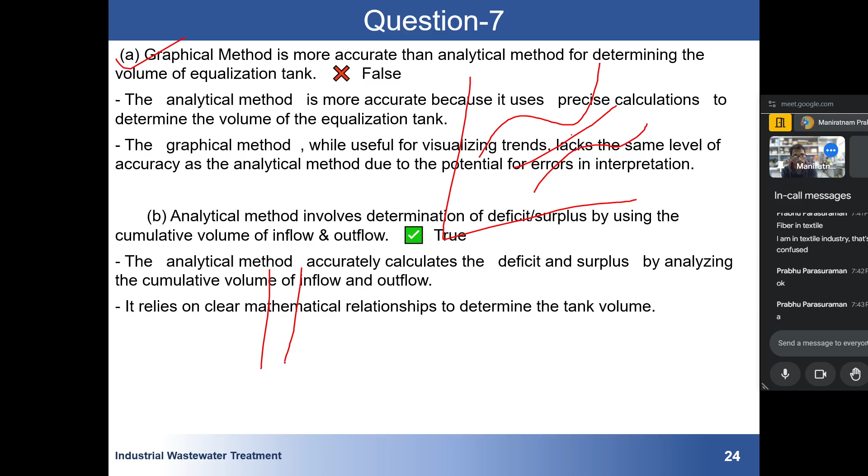Analytical method involves determining deficit and surplus by cumulative volume of inflow and outflow. This is true. We try to find the cumulative value. Suppose for this particular time, x amount of water is coming, then y amount; the cumulative value will be x plus y, and based on those values we find our equalization tank volume and overall discharge. All of you must practice the numerical questions discussed in your video lecture. A discharge value for each hour will be given, then you have to find the cumulative value. Then for peak period you have to multiply by some factor like 0.8, I don't remember the exact value. Then based on that peak value you find the volume. So this is true. That's why it is not our answer.

In graphical method, tangents are typically drawn parallel to the mass curve, not perpendicular. Again, same diagram. Our curve looks like this, and we plot a parallel line, not perpendicular. Perpendicular means this. We do not draw this kind of thing. That's why it is incorrect, and that's why it is our answer. Vertical ordinates are measured between mass curve of the outflow and tangent. This is also related to the numerical question. If you have not understood this question, I suggest you read those lectures or watch those videos.

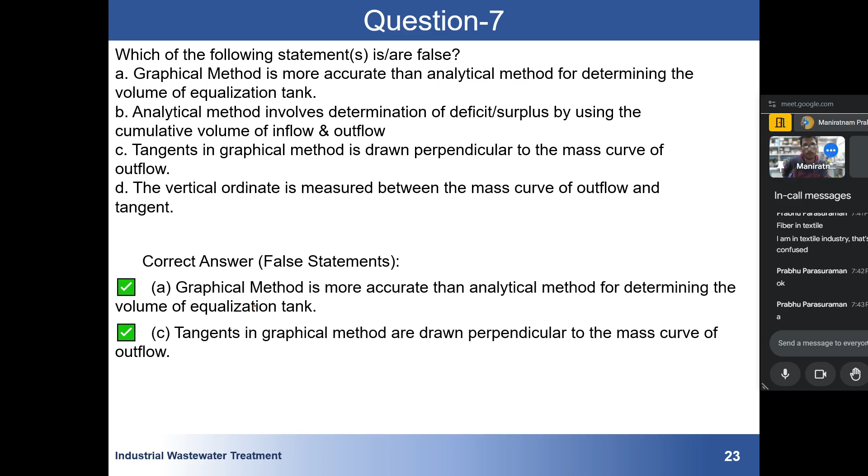How much time do we have? We have 10 more minutes.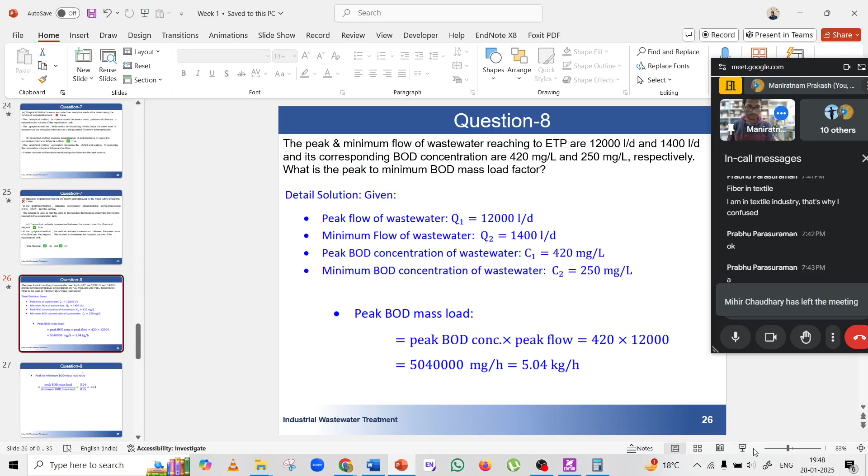So this was our question. I'm solving it now because we have only 10 minutes.

The peak and the minimum flow of the wastewater reaching the ETP. ETP and STP are common terms used for wastewater treatment plants: effluent treatment plant and sewage treatment plant. 12000 liter per day, then 1400 liter per day, and its corresponding BOD concentrations are this much and this. They are simply asking to find out the ratio. This was a very simple question.

The peak mass load will be peak BOD concentration into peak flow, that is 420 is the peak concentration, and the peak flow is 12,000, sorry, not 1200, 12,000. So this will be in milligram per hour. Here there is a unit conversion, okay, so it is in milligram per liter,

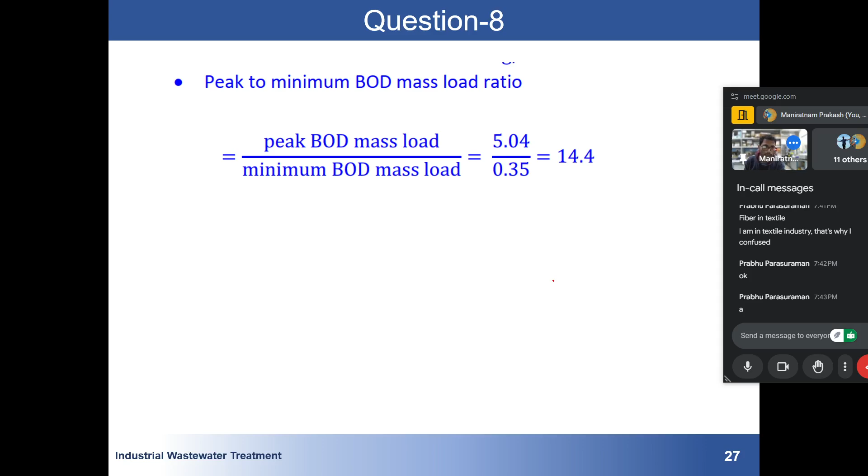Next question: what is the equalized phenol? Just solve it. Take 1 minute and solve it. This is a very easy question. Mass balance question. I have already shown you two questions related to this theory.

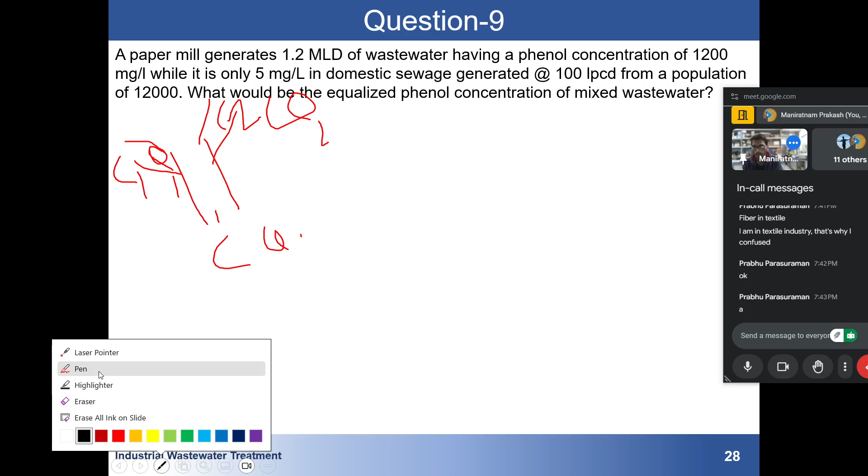Use the concept: suppose discharge is coming from this area with a concentration C1 and flow Q1, and here it is C2 and Q2, and then our final concentration is simply C and Q. Then C will be given by C1 into Q1 plus C2 into Q2 divided by Q1 plus Q2.

A paper mill generates this much MLD of wastewater having phenol concentration this much milligram per liter, while it is only 5 milligram per liter generated at this many liters per capita per day. So remember, you have to convert into MLD first. You multiply by the population to convert it into MLD. Here it is 1.2 million liter per day, but here it is 100 liter per capita per day, and the population given is 12000.

So this is the general formula. C mix will be c1 into q1 plus c2 into q2 divided by q1 plus q2. So c1 is given, and for finding q2 you have to multiply by 12000 people, because the population is 12000. Then q2 will be this into 12000, and as you have to convert into million, million means 10 to the power 6.

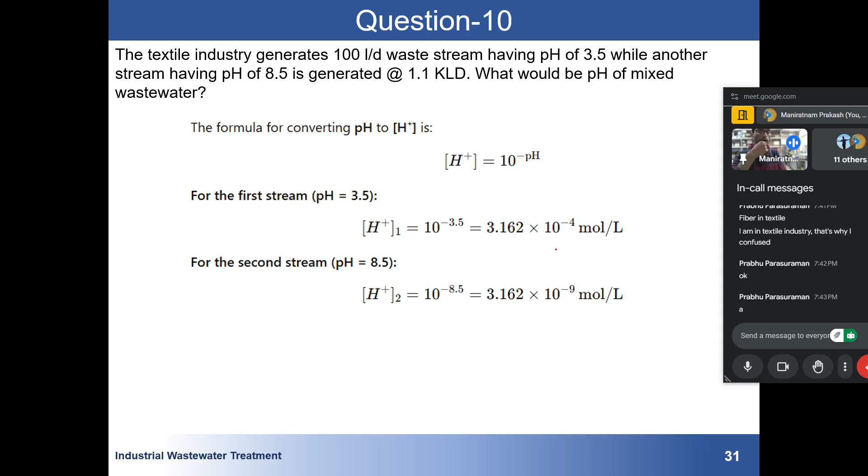Again the formula will be the same, C1 into Q1, where C1 will be the H plus concentration. Similarly you have to find the final H plus. For pH 3.5, H plus will be 3.16. For pH 8.5 it will be 3.16 into 10 to the power minus 9 mole per liter. So total H plus will be,

for the first stream it will be H plus 1 into Q1, they have multiplied it, and here I have converted 1.1 KLD to liter per day. So H plus coming from the second stream will be this much mole per day. I have just written it, but I could have put the value directly here. So total H plus is this thing.

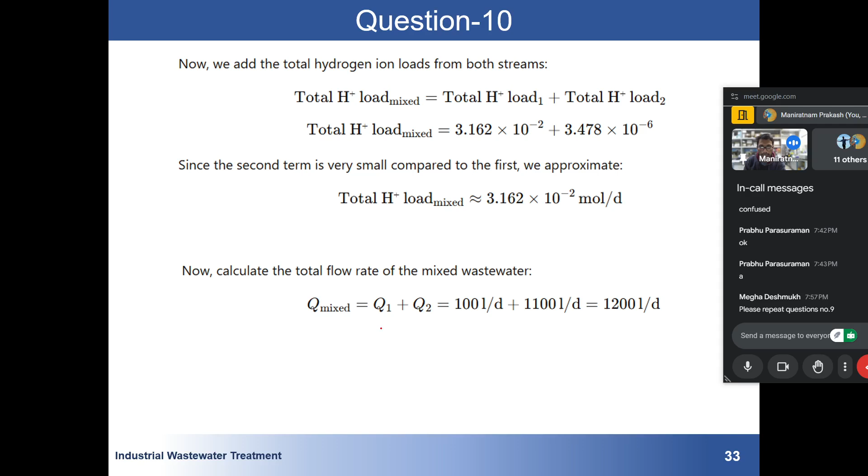Then finally Q mix is equal to Q1 plus Q2. So H plus will be C1 into Q1 plus C2 into Q2 divided by Q1 plus Q2. H plus will be 2.63. Then we can put the value of pH. We know that pH is equal to minus log H plus concentration, and we have the pH of 4.58.

Please repeat question 9. See, you have to use this formula. If something is coming from one stream and something is coming from a second stream, both will mix up and flow with a flow of Q1 plus Q2. Something is coming with C1 and Q1, something is coming with C2 and Q2. Whatever amount is coming from here and from here will mix up and give you the flow of Q1 plus Q2.

So we know something called mass balance: whatever is coming in from this side, the same amount will be going out from this side. So the final expression will be C1 into Q1 plus C2 into Q2 is equal to C mix into Q1 plus Q2.

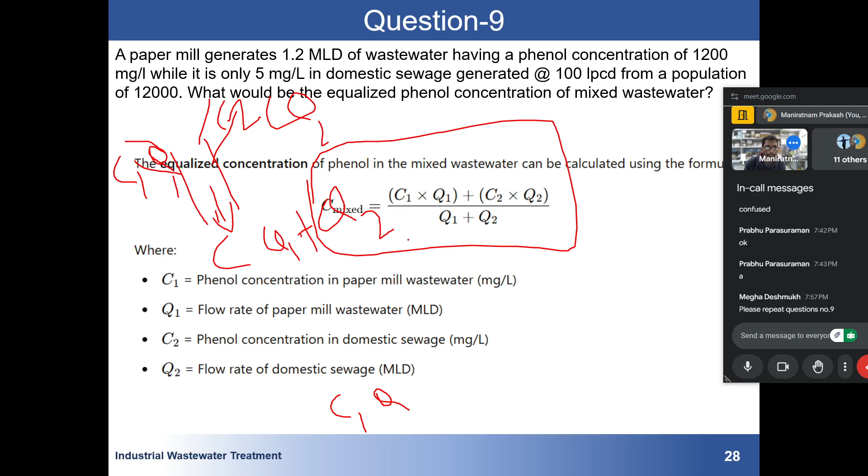Let me explain again. Do you have clarity about this formula? Any doubt in how we get C mix equal to Q1 into C1 plus Q2 into C2 over Q1 plus Q2? Clear? Then C1 is 1200 milligram per liter, Q1 is 1.2 MLD, that is okay. C2 is 5 milligram per liter, but we have to convert Q2 into the same unit.

For this, we know it is 100 liter per capita per day. To remove the per capita, or per person, we have multiplied by the population, 12,000. And here it will be 10 to the power 6; there is a little writing mistake. 1 followed by 6 zeros. Clear? So we have found out Q2.

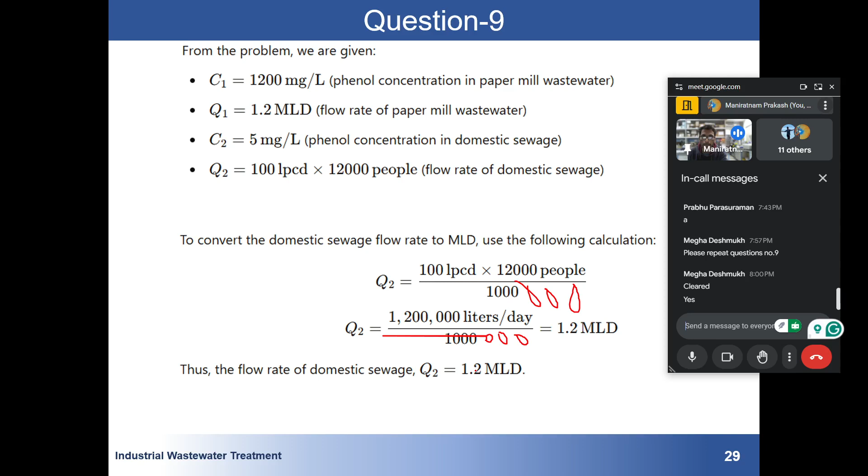Once we know Q2, we put the value here. C mix is equal to C1, 1200 milligram per liter, into Q1, that is 1.2, plus C2 into Q2, divided by Q1 plus Q2, and finally we have the answer of 603 milligram per liter. Any more doubt? It is already 8.

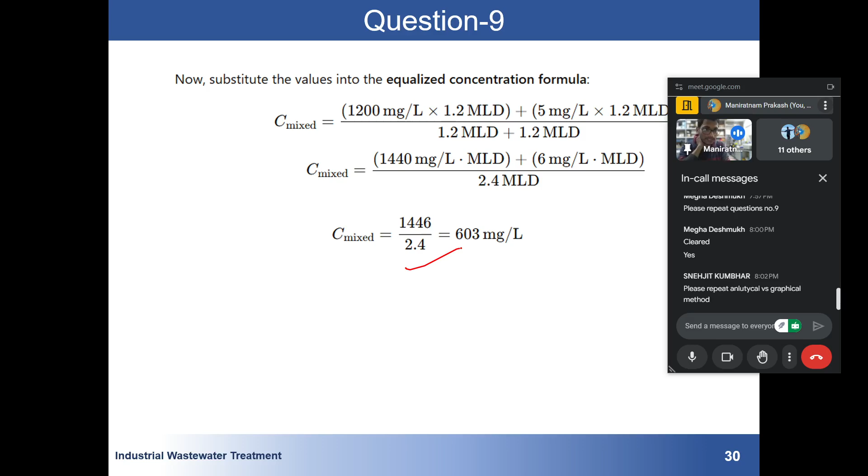Please repeat the analytical versus graphical method.

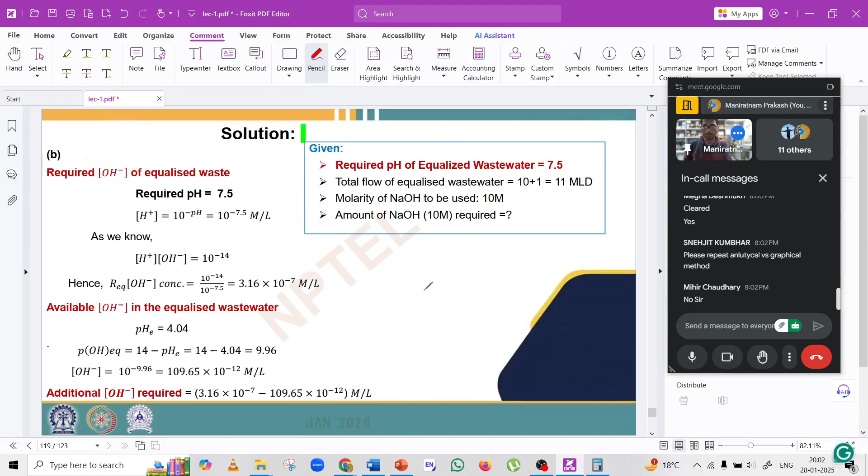See, in analytical method, I think a better way to explain is this thing. Here you can see they have talked about how to design. Okay, now.

So in graphical method, what we do: we know our flow, we know our volume, and whatever amount of wastewater is coming to our treatment plant. So we plot a cumulative volume diagram, that is known as the mass flow curve.

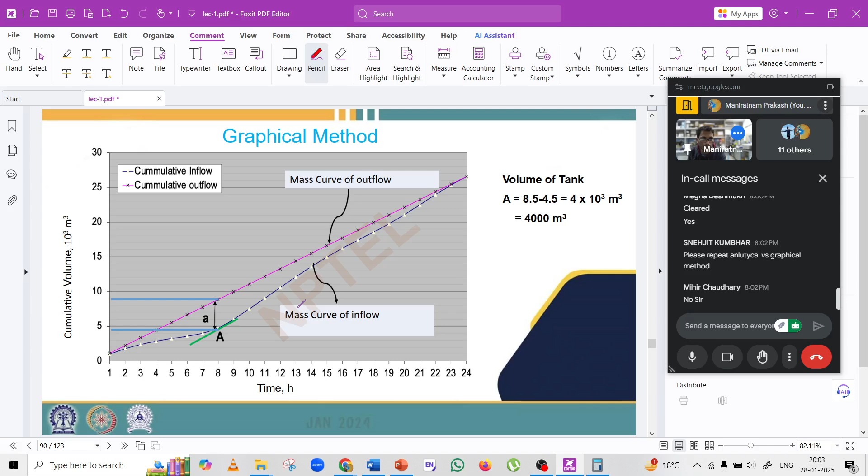And based on the value of this curve, we find A and B, and based on that we try to find out the volume of the equalization tank. So this is the graphical method. You will be given some values, the discharge that is coming before the treatment plant.

We first do analysis, and from analysis we come to know that in a day we have 24 hours. For the first hour this much water is coming, in the second hour this much water is coming. We know these values. Now, based on these values we plot a diagram,

Then we plot the diagram, and based on the tangent, we find out the volume of the tank. You can see here the tangent is coming at point B, and here the tangent is cutting at point A. So we will note down the value of point A, and we will note down the value of point B.

It works on the principle that in a 24-hour day, there will be a point where maximum water will be coming, and on the same day there will be another point where the minimum amount of water is coming.

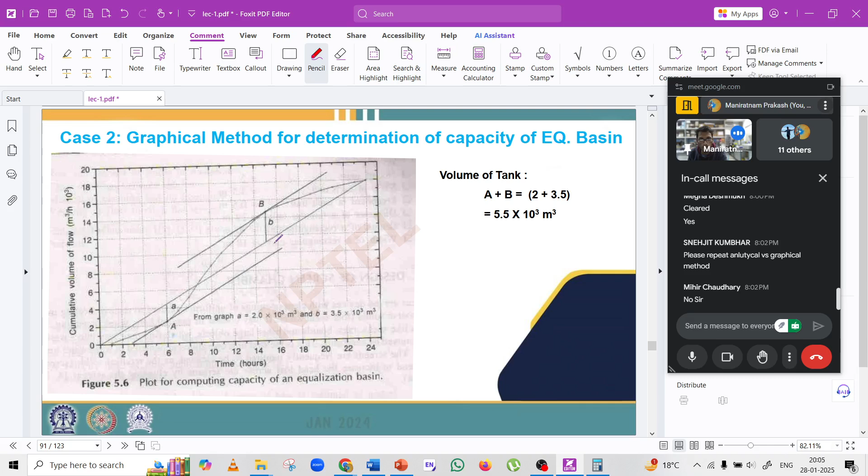And there is another method, the analytical method, that uses some kind of formula, and based on that they try to find out the cumulative volume and all this. So here you can see that the graphical method is very old and does not provide accurate estimation of value, and it requires drawing, but in the analytical method, this is another thing. But I hope this is clear.

To know more about this, I will request you to go through the lecture. Sir has discussed it in great depth. I am just giving you the overview. Any more doubts?